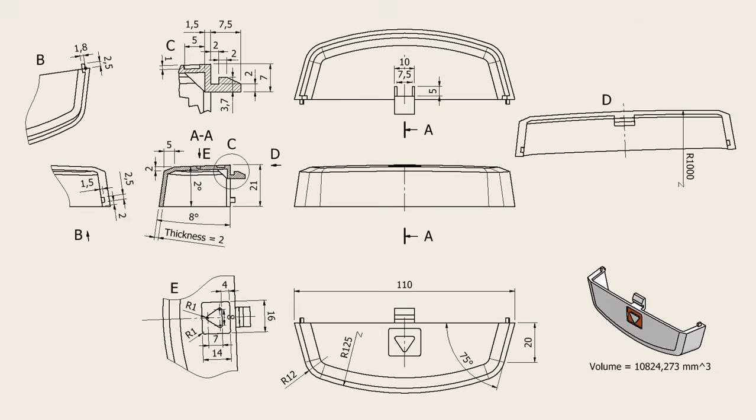Hi my friends, today we model this part. It has the name fuse cover, and the drawing is this one. We start by using this all dimensions. You see radius 12, radius 125, 75 degrees, 20 and 110.

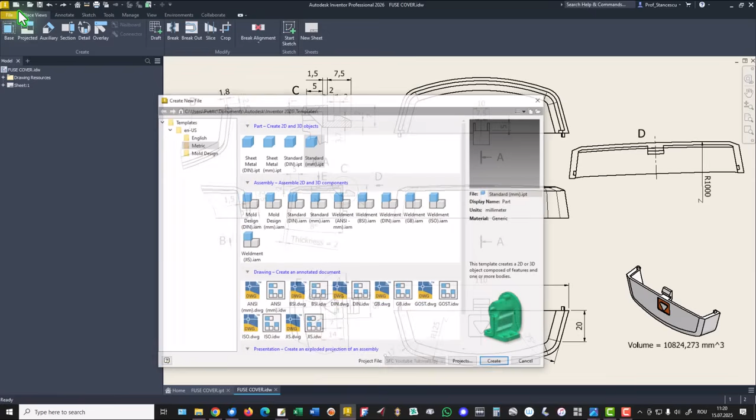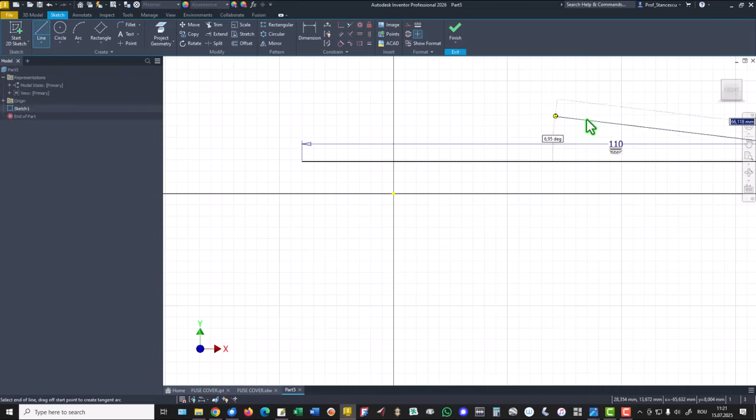New standard millimeters IPT, new sketch, this XY plane, and we draw a horizontal with the length of 110. This line must have the center placed in the center point.

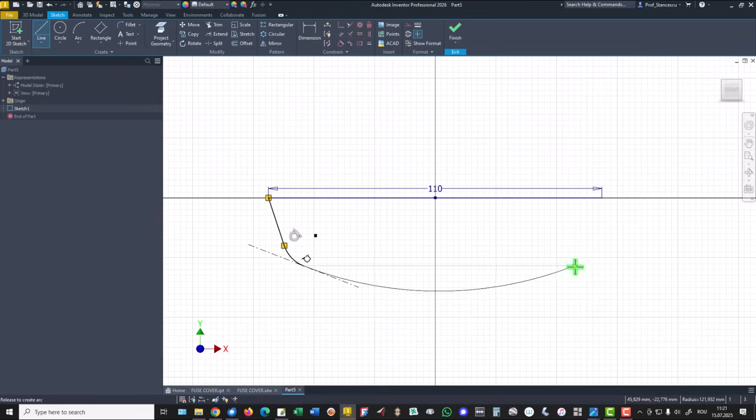Starting from this, we draw a line, keep press the left button, go here, keep press the left button, go somewhere here, keep press the left button and go up to the end.

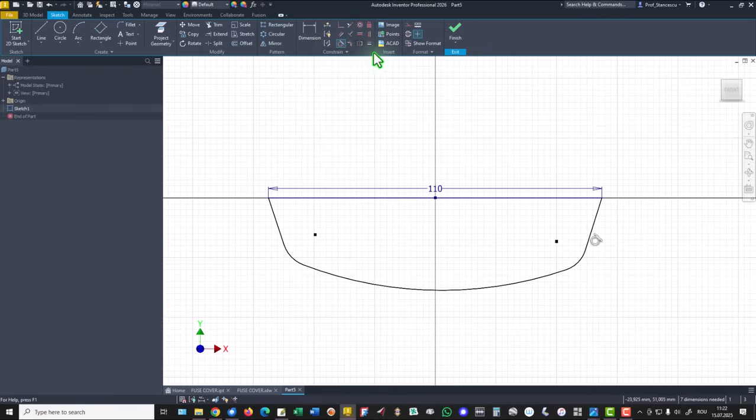This is not vertical. But it is tangent with that arc. Equal are these two arcs. This point must be placed on the same vertical with the center point. Equal must be these two sides.

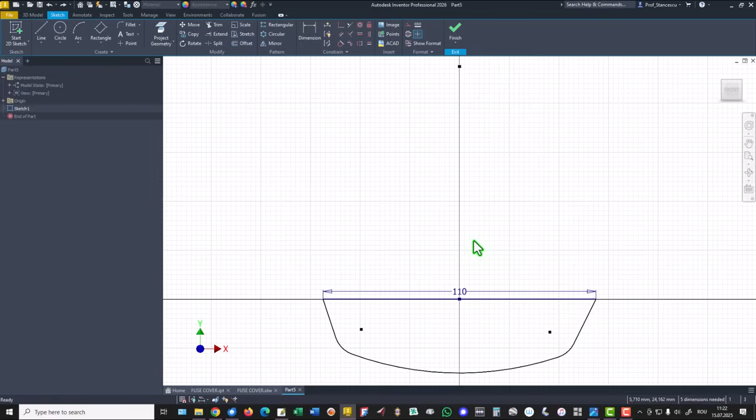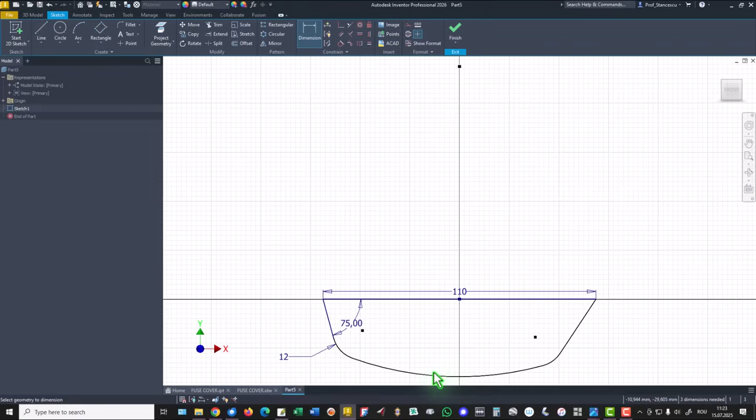We place an angle of 75 here, then radius 12, this is radius 125. I move this to the right because I want to place equal between these two sides.

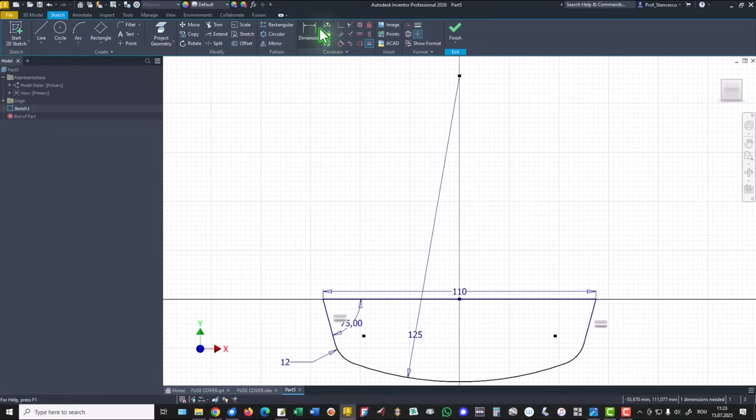One dimension needed, this distance of 20. Okay, finish sketch, extrude 21.

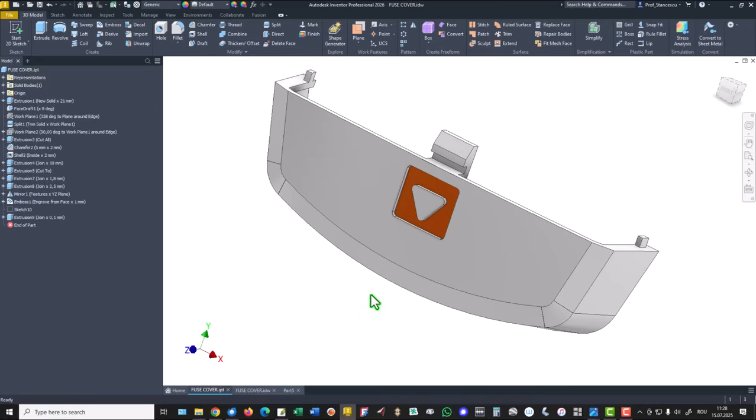Then I have to apply this face draft. All this contour is sloped. Dimension is 8 degrees for that face draft.

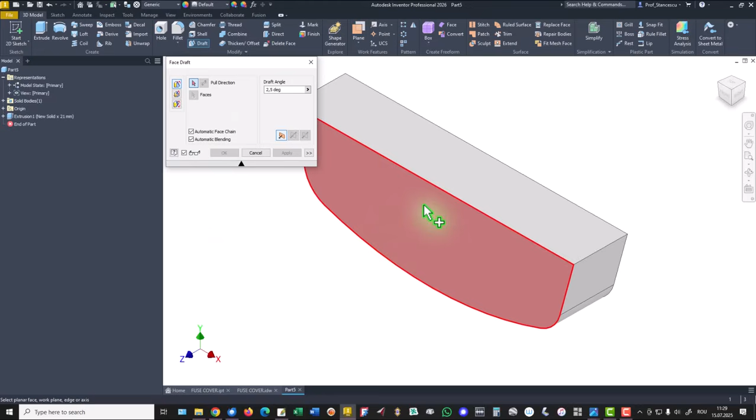We select the tool face draft. It is here. We select direction. This is the pull direction. Then we have to select faces. I select this, and I place here not 2.5 but 8 degrees.

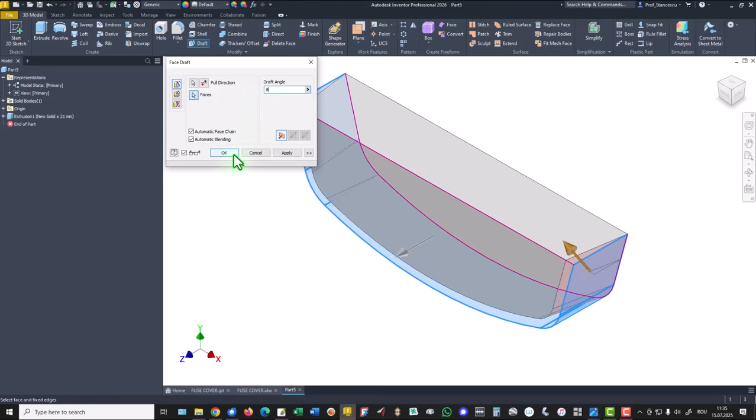This must be reverted. We select the tool draft, we select the pull direction, then the faces, then the angle of 8 degrees. All faces are sloped. Okay.

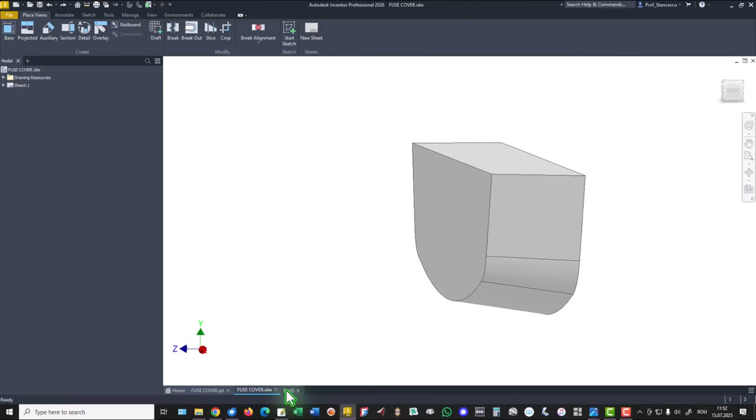Now we see that this face is parallel with the other, but the part has this face not parallel with this, but at an angle of 2 degrees. It is plane. The other problem is that this face is curved on about such an arc. You see here, this is curved.

Okay. To apply these two steps, we have to respect 2 degrees and the radius of 1000. You see?

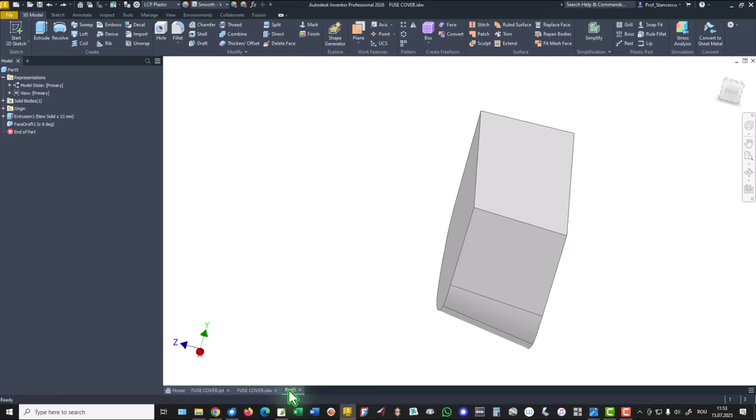Firstly, we create the plane at an angle about this end plane, then we'll use the perpendicular plane on this one to create this arc. Let's do this all. We create a plane based on this one and this axis.

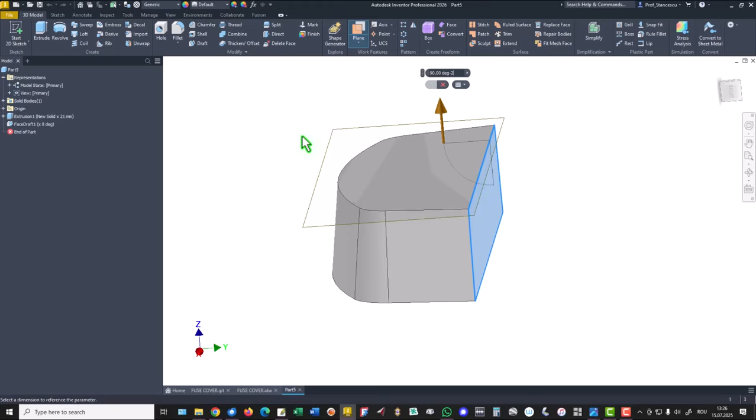Here we have to rotate this 2 degrees. This means 90 minus 2. Then another plane based on this and this axis to be perpendicular, as you can see now, to the other.

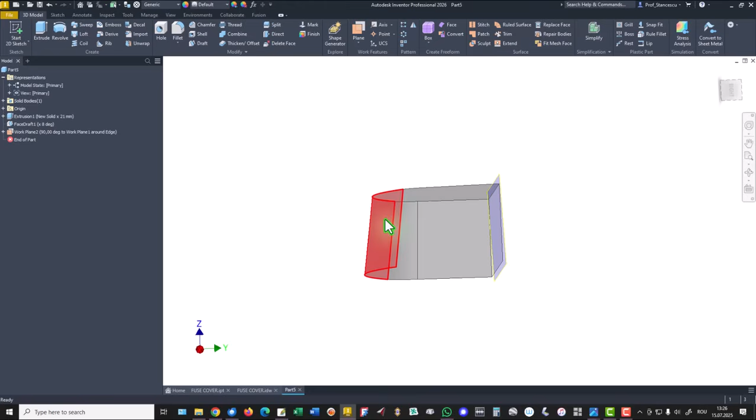We hide this one, visibility, and we use this for a new sketch. We draw a horizontal line of 110, but we copied the dimension from these 2 points, this point and this point.

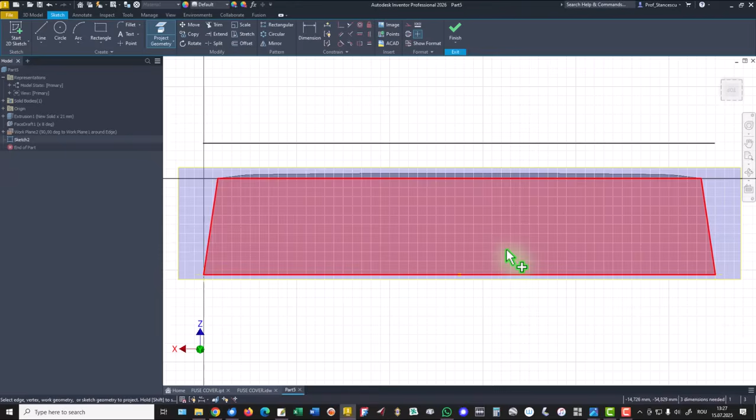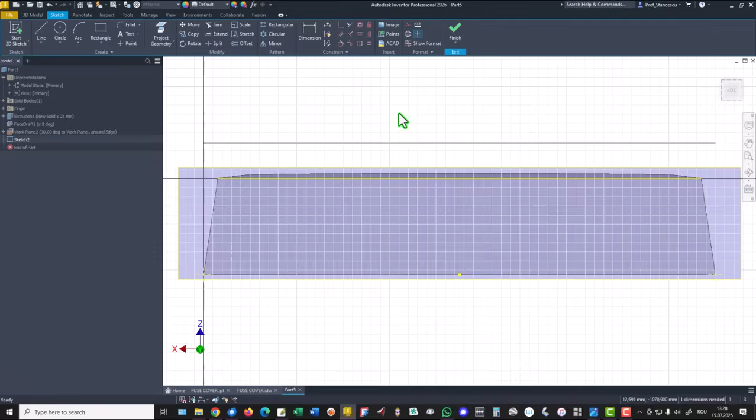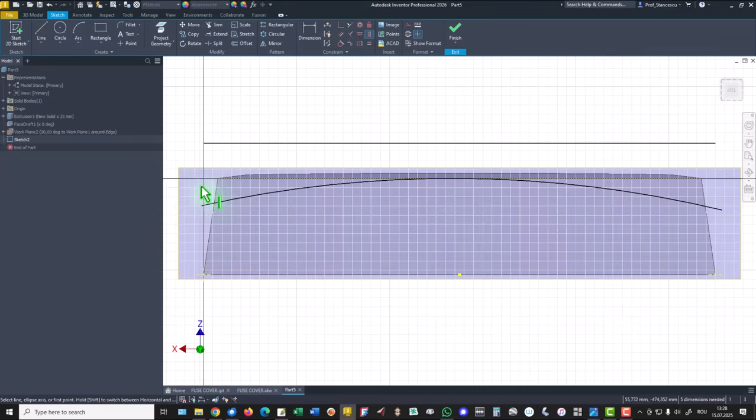Vertical is this end with this end, also this with this. Then we project this line as a construction line, because we place now an arc tangent to this line. On the same vertical is this point with this end, this end with this end.

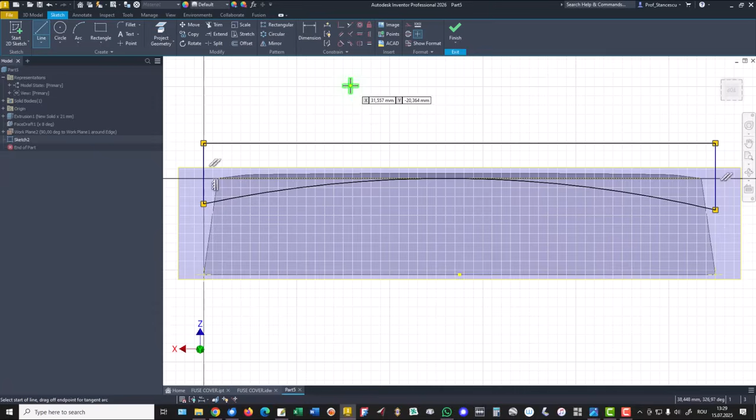We connect the two and we place the center of this arc on the same vertical with the center point. Good. Now you see here that this is upper beyond this tangency, yes? We have to cut this part.

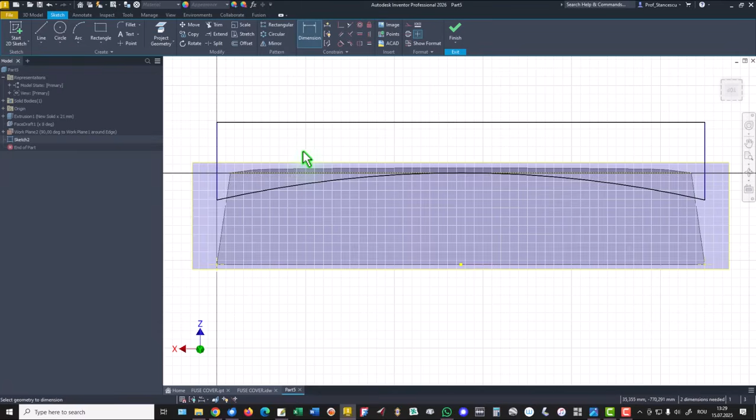The radius is 1000, my friends. 1000, 1 meter. Finish sketch, extrude with cut all the way through the part.

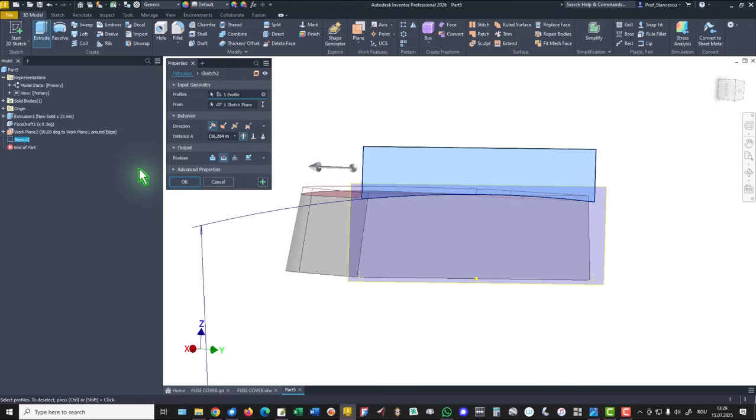Okay, we hide this visibility, we hide the plane visibility, and we have what we want to have. Next is this chamfer of 5 on 2 millimeters around this contour.

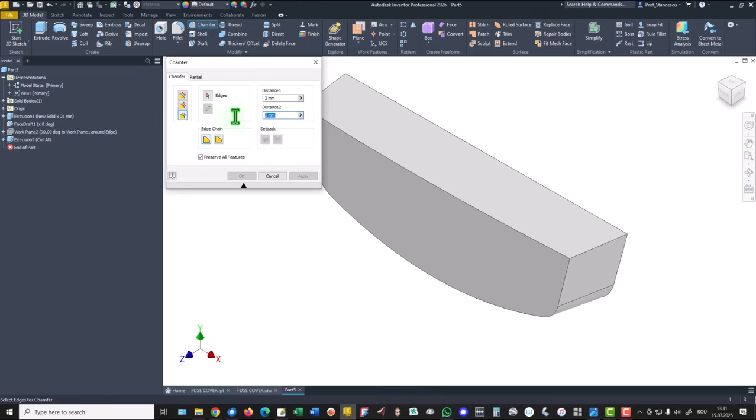We apply chamfer, we select this solution with 2 dimensions, and this is 5. 2 is by default. We select the edge. Okay.

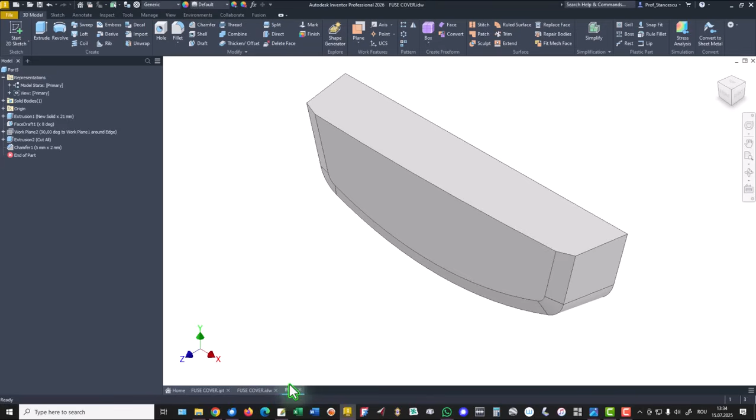We see that the part is empty on 2 faces. The thickness is 2. We apply shell. Shell on 2 millimeters by ignoring this and this face. Okay.

We continue with this feature. You see here the detail with all dimensions placed on the plane of symmetry perpendicular here. The width is 10.

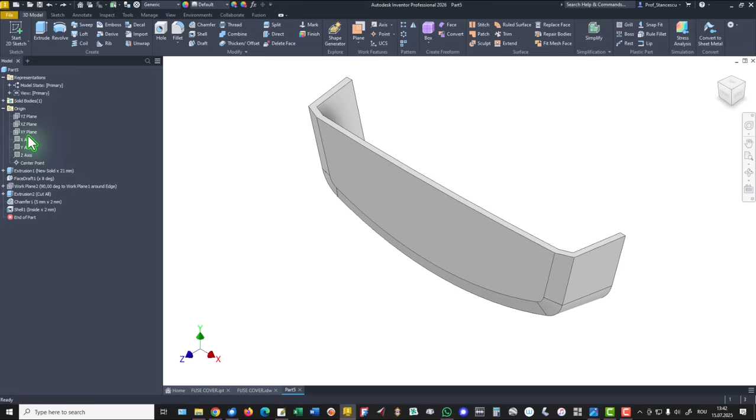We open the origin and then this plane, F7. We rotate it to be like in the drawing, and we project this and this. Draw lines.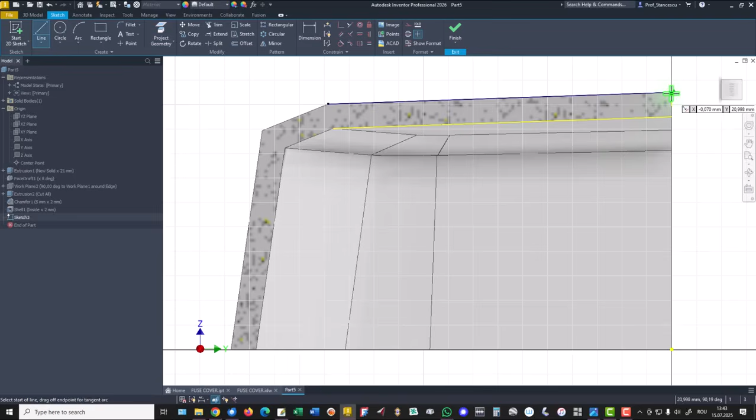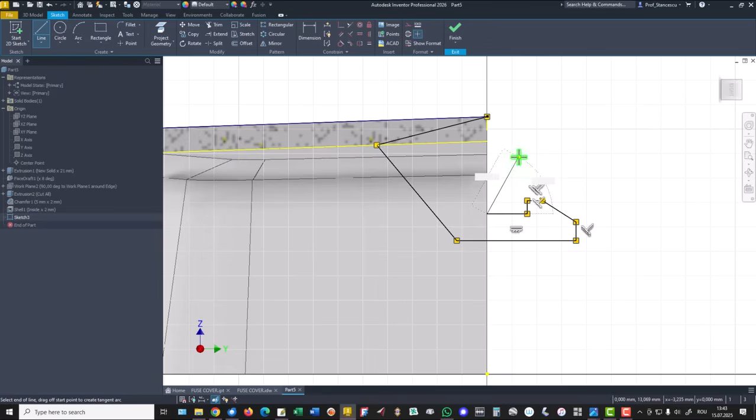Then we go somewhere here, horizontal, up, sloped, horizontal, down, here, and back.

Okay, now we apply dimensions. This is 5. Then we move this for a while because we have a dimension here of 1.5.

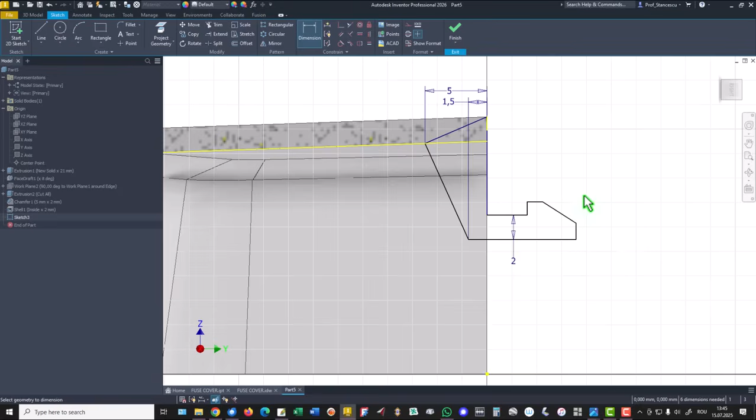Then 2 millimeters is this. Seven millimeters is here. 2 millimeters, and also 2 millimeters, and 7.5 here. 7.5. This is also 2 millimeters, and 3.7 is this. Dimensions in the drawing.

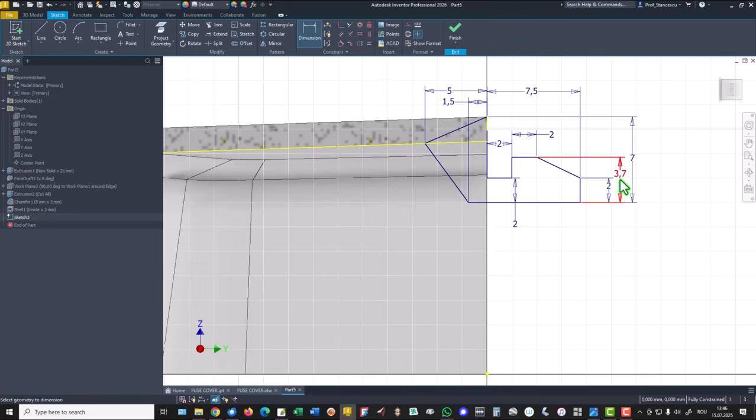We have a fully constrained sketch. Extrude. We select this area, symmetrical, on 10 millimeters by default. Okay.

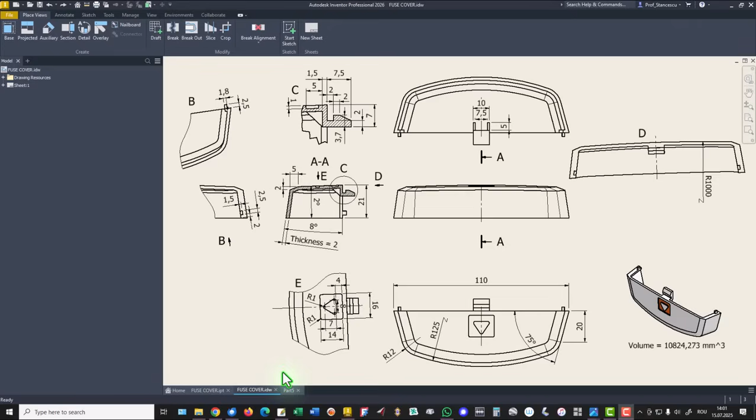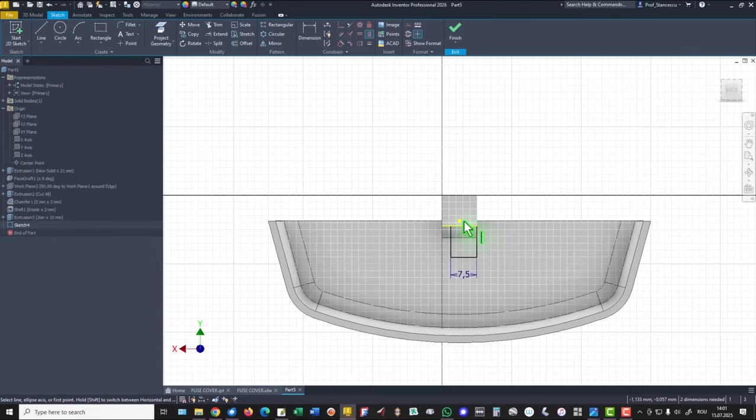We turn back the part, we select this face, and we project this line. We draw a rectangle based on this with this dimension of 7.5. The other is not important. On the same vertical is this with this. Finish sketch. And now we project this on the face, on the curved face. We project, we extrude with cut to this face. Okay.

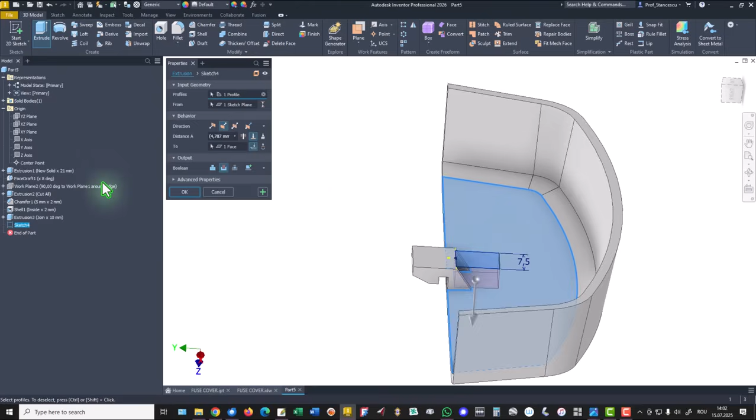Now we take a look here. You see something, but I forgot to place a dimension here. Let me place it: 1.8.

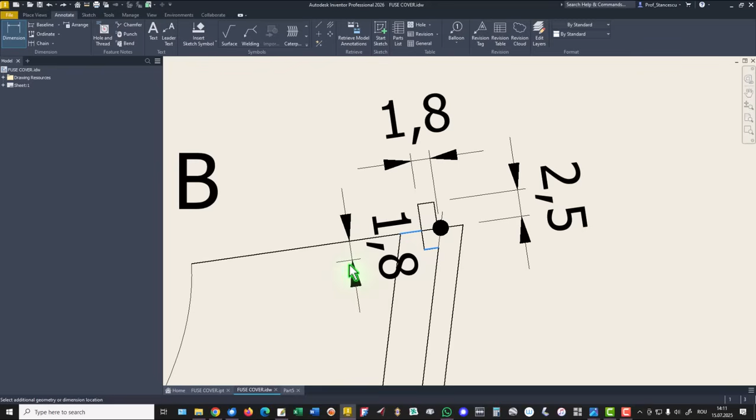This thickness of a small feature, I place this somewhere here. I said that we focus here by using this, one of these two faces. Then we apply symmetry. Okay.

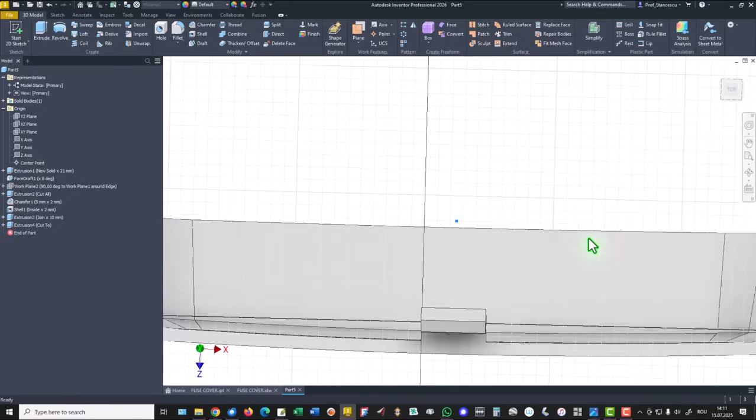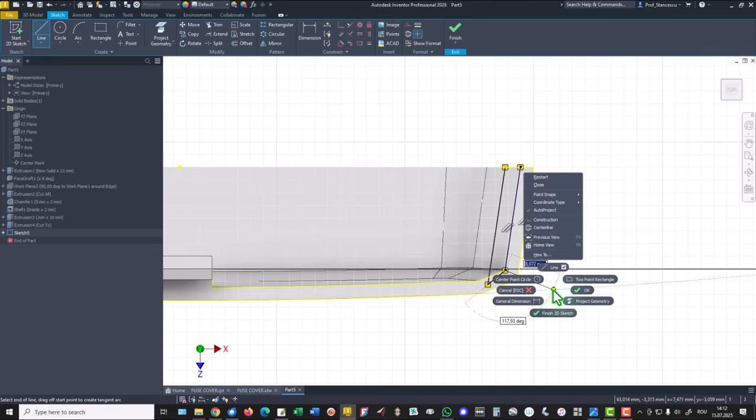We select this face for a new sketch. We project it. Then we draw a horizontal line here. We hover on this line to have a parallel, and we go back here. Okay. Important is to have this point inside the material here. This is why I place on the same horizontal this point with this point.

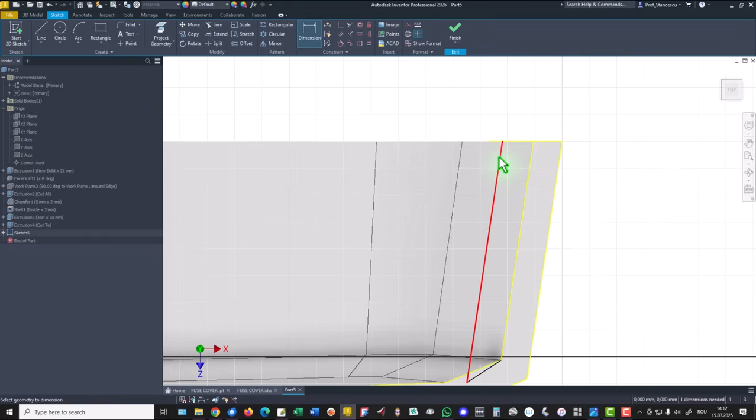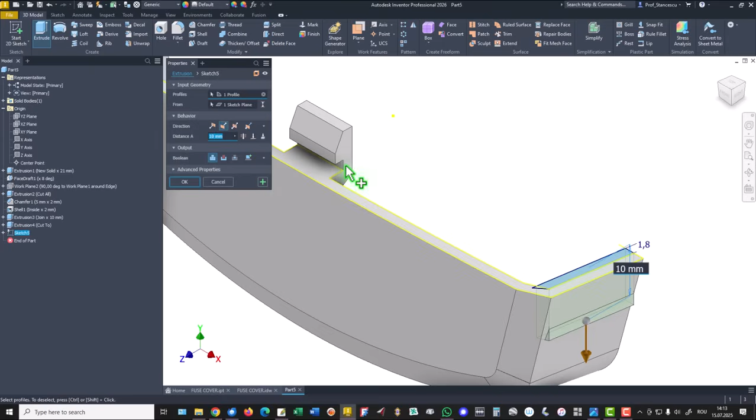Now that dimension of 1.8, finish sketch, and we extrude this area on the other dimension of 1.8. You see now this result.

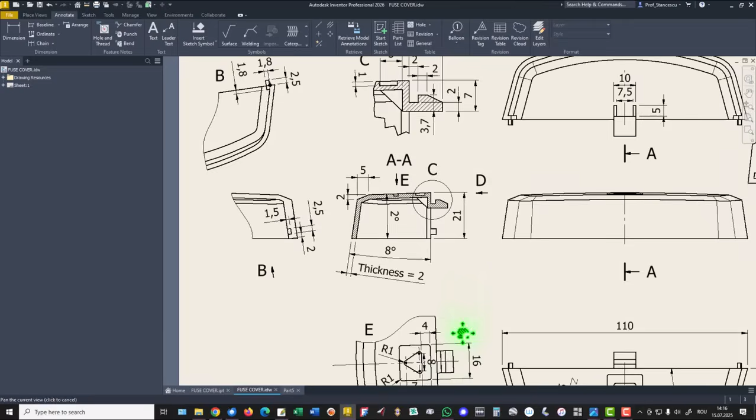We continue with placing these two small extensions. Dimensions are here: 1.5, 2 millimeters, 2.5. A rectangle here.

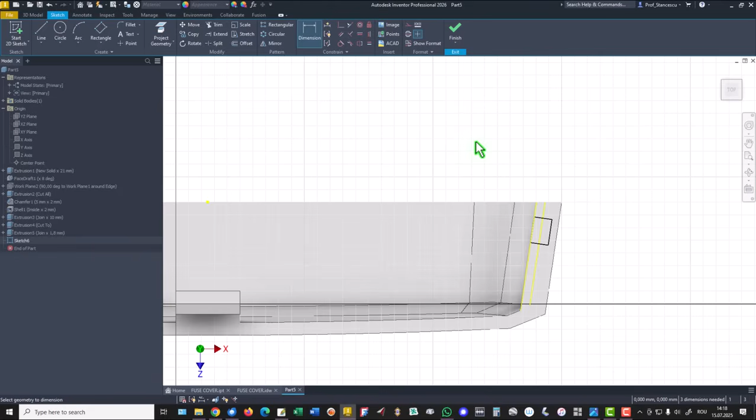We use this face. We draw a rectangle, as I said, but in 3 points: this, this, and this. Dimensions: 1.5 is this. 2.5 here, but aligned. 2.5, and then 2 millimeters from this line to this point. 2.

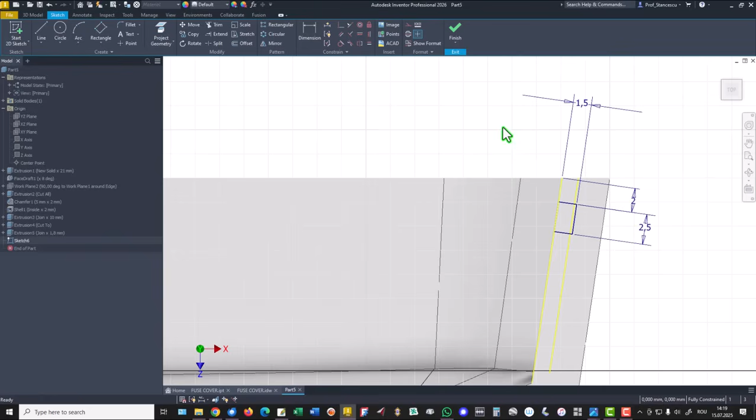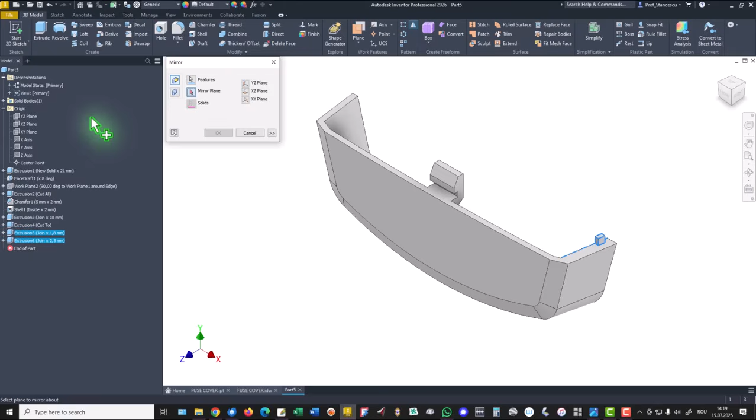I want to eliminate this line. Then finish sketch, extrude on 2.5 up, 2.5. This last feature must be mirrored, 1, 2, about this plane, and we receive this.

Okay, the last feature is this emboss. Dimensions are here: 14, 7, radius 1, 8 millimeters here, 16 and 4.

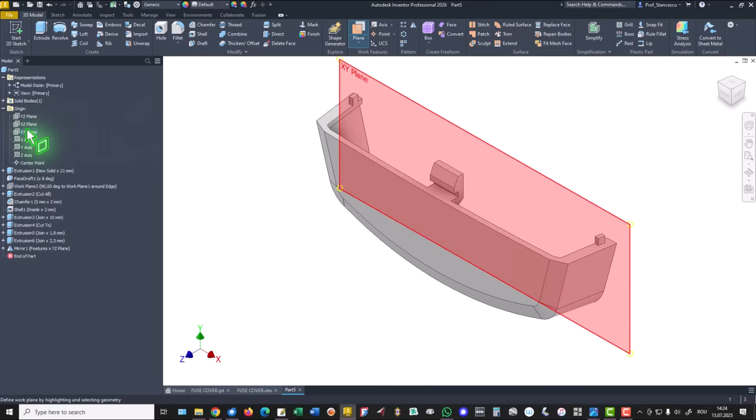We have to place a plane in the air here because we project the emboss to the part. To do this, we select this XY plane and we move it outside of the part here. New plane, new sketch.

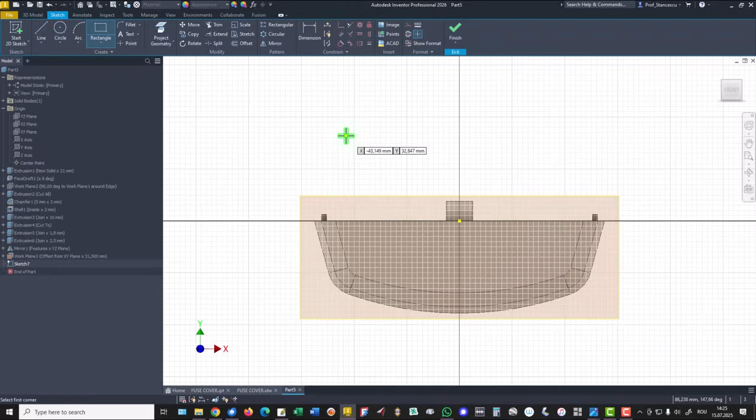We draw a rectangle of 16 on tab 14. We place it aligned with the center point on vertical. We draw a triangle, three lines. This is horizontal. This distance is 4 millimeters.

And this distance is 2 millimeters. Then we apply fillet of 1 millimeter to the corners of the rectangle and also to the corners of the triangle. Equal are these two lines, and on the same vertical is this center with this point.

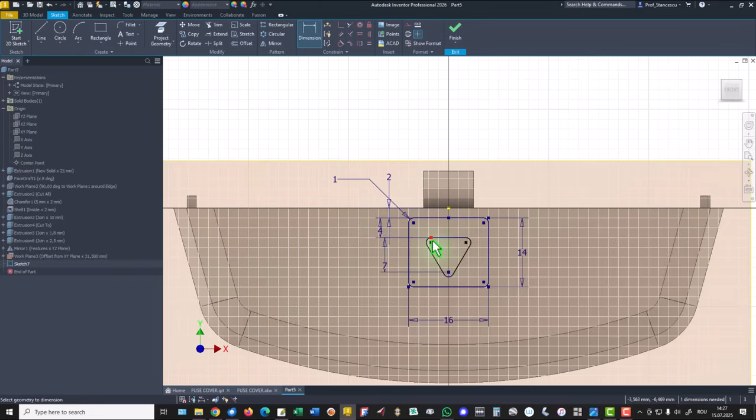Other dimensions: 9 millimeters from this, not 9 but... other dimensions are this distance of 7, this of 8, and we have a fully constrained sketch. Finish sketch.

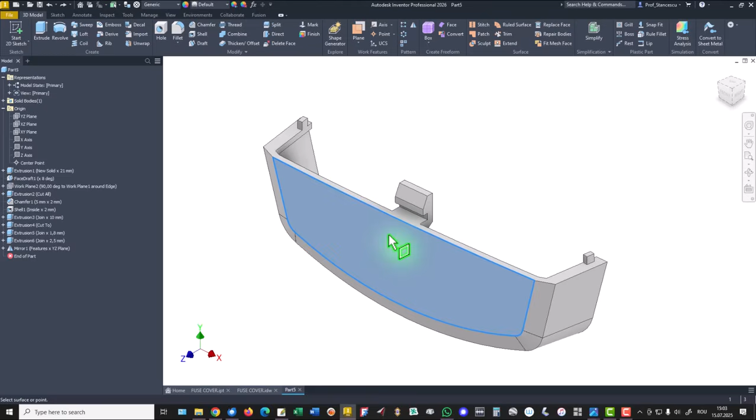We create a special plane tangent to surface through point. This is the surface and this is the point. Then we use this for a new sketch. The new sketch, I hide the plane and we create our sketch.

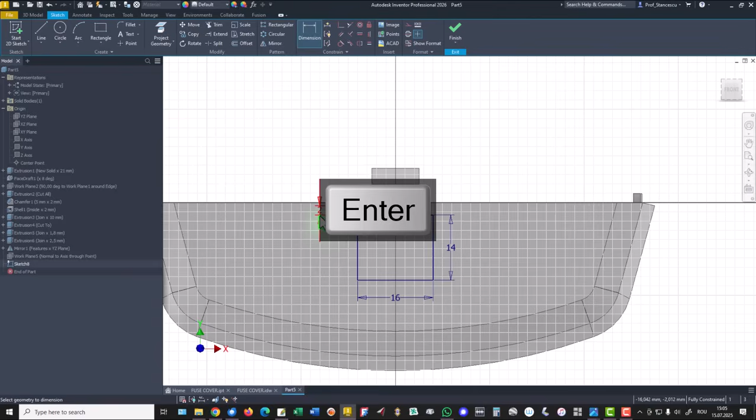A rectangle with dimension 16, tab 14. On the same vertical is this point with this point. A distance of 2 millimeters is here. 2. Then we draw a triangle inside the rectangle. Equal are these two sides. 4 millimeters is here.

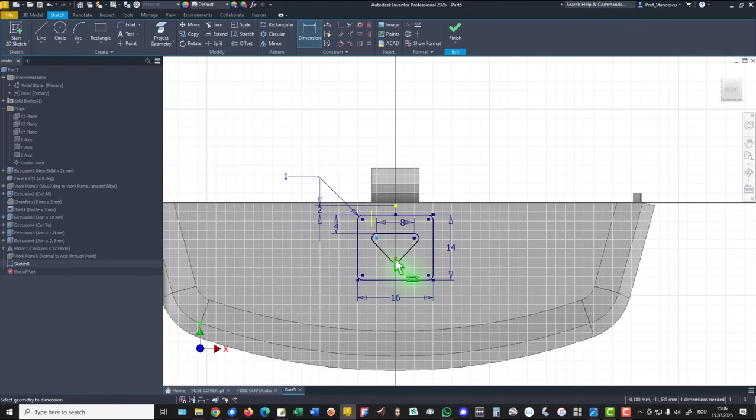Then we apply fillet radius of 1 to each corner. This corner, this, and this. On the same vertical is this point with a center point. Other dimensions are 8 is this, 7 between 2 points here, and we have a fully constrained sketch.

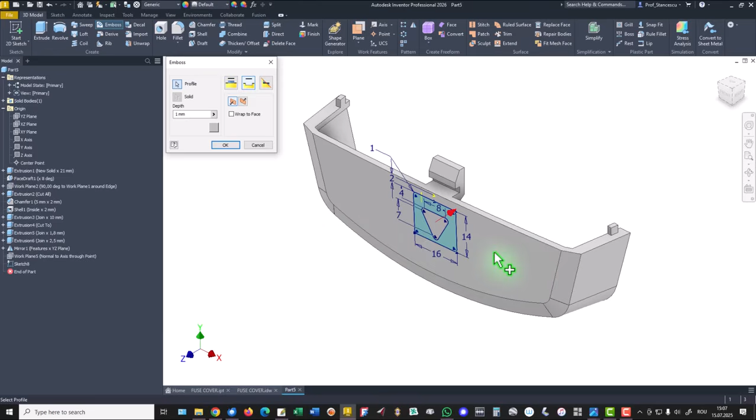Finish sketch, and we apply emboss. We select this area, we select this option, we select to wrap to face. We want to be attached to a curved face, and we select that face. Okay, very nice.

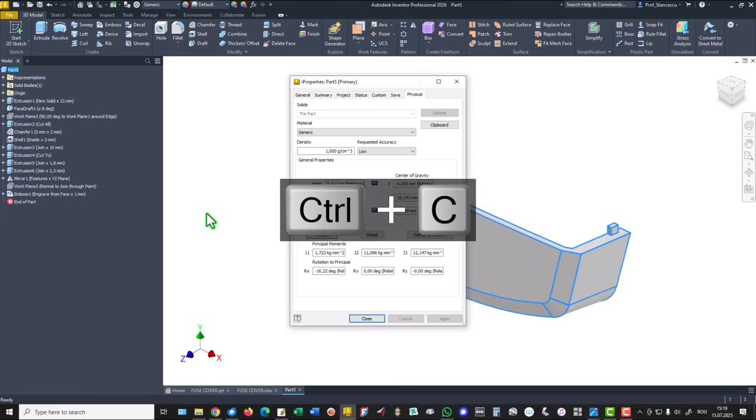Let's see what is the volume. iProperties, physical, update. We select this, copy, close, drawing, double click, and the new value is almost the same. We keep the last value because this is what we did here today. The material is plastic, PPS plastic.